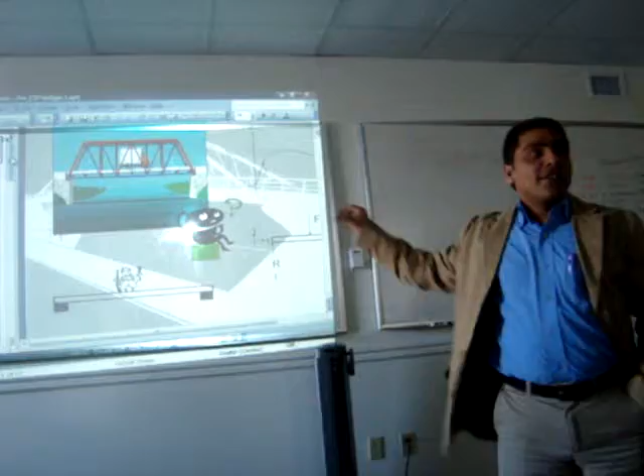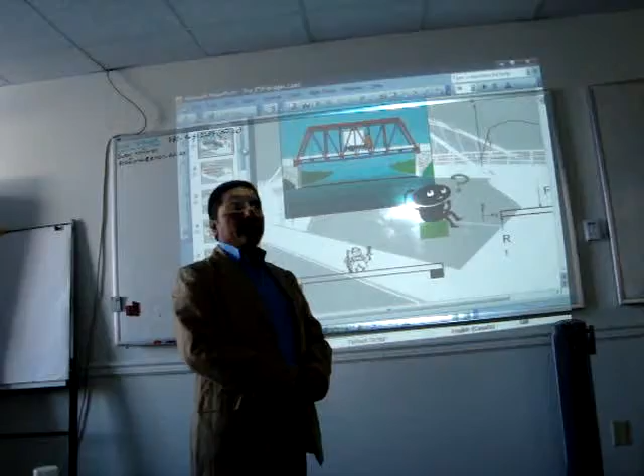I was really struggling to find a subject which could be of interest to everyone in the classroom, because there are few civil engineers and the majority are non-civil engineers. They are tending more toward technological subjects. Here I have a few figures or shapes which can brainstorm you toward a significant structure, and I think every one of you can easily configure the topic of my presentation, which is very general in understanding, very straightforward for the technical aspects, and which is a very major part of civil engineering.

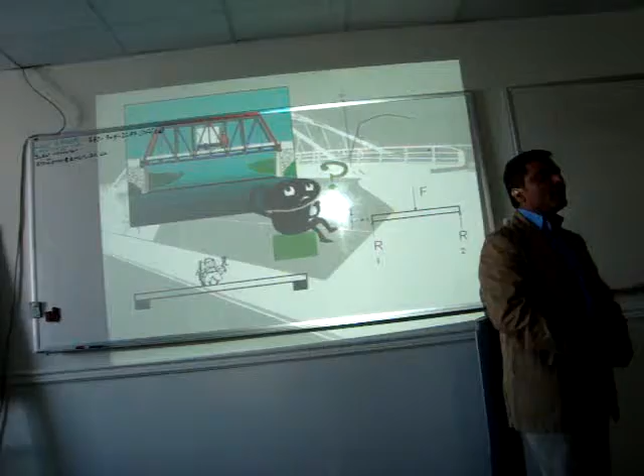Whenever you think of a civil engineer, you think of bridges. Bridges, as I told you, are the most common or most significant structures on the earth. Bridges on the earth imply many things. Bridges imply development in the world. Some bridge sites are romantic sites. You can recall your memories from Westminster Bridge, a poem from England. I'm forgetting the poet's name, maybe Wordsworth. Some bridge sites are sites of beauty. They inspire people. People want to visit those.

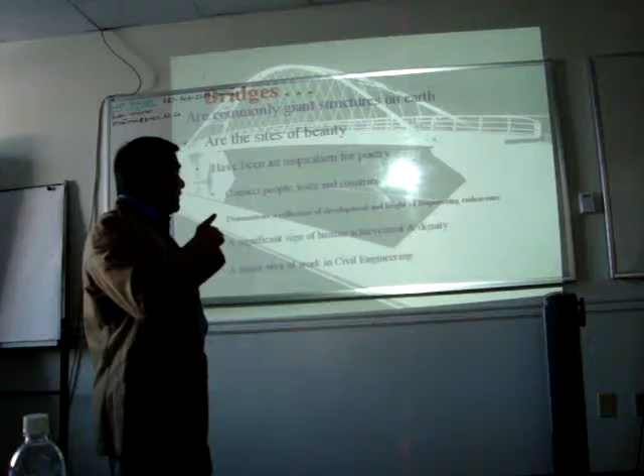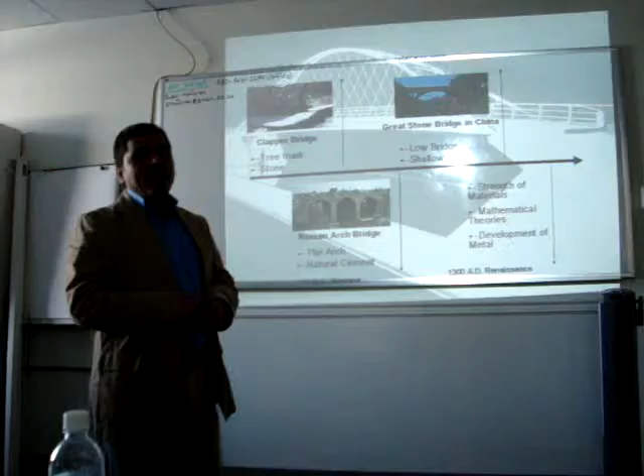But as a civil engineer and in general as an engineer, we are concerned with the technical or engineering aspects of bridges. We will try to figure that out today, and in the very last part of the presentation, we will try to learn how we can design a simple kind of bridge which is called a truss bridge.

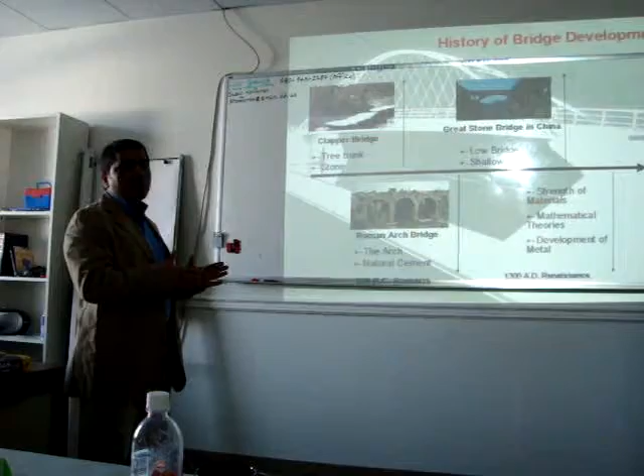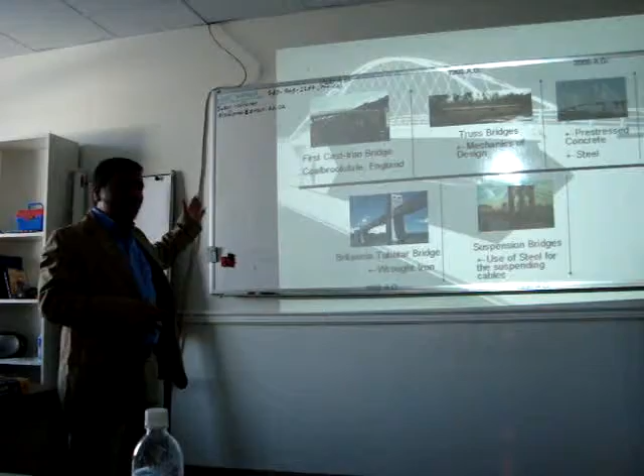This slide demonstrates how bridges developed through history. The bridge is not a new structure. People have been using it since BC, the old era, to the year 2000. They have developed over time through the materials utilized to build or construct a bridge, through technology and through engineering.

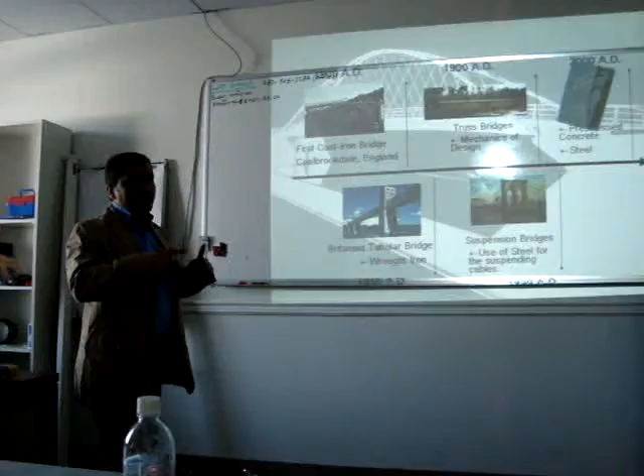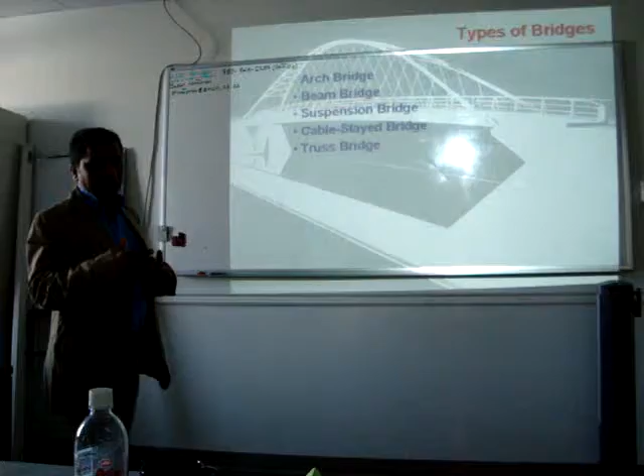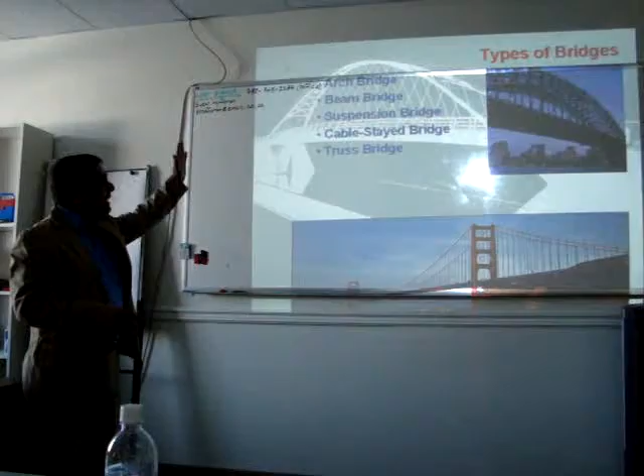Now we have very modern kinds of bridges, but mainly these depend upon a few basic concepts like the span, the requirement. What is the span we need to bridge, and what is the economical or feasible material available. These are the main basic kinds of bridges: arch bridge, beam bridge, suspension bridge, and cable stayed bridge.

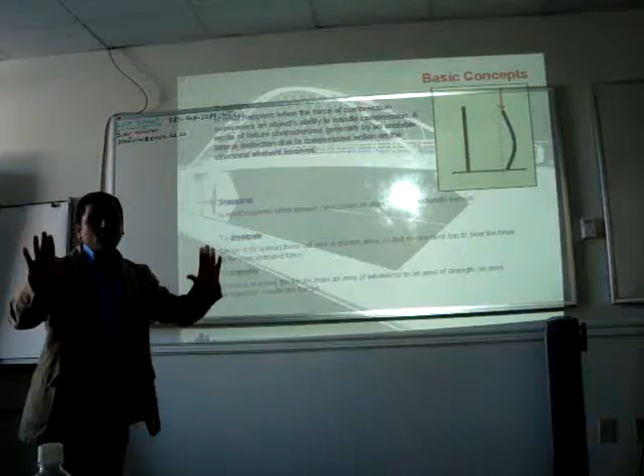Now the question arises of how bridges work. Every bridge is exposed to stresses like any structure in the world, but bridges are special as they carry live load as well as dead load. And the live load in the case of bridges is more critical for a designer. And nearly every bridge is exposed to the environment also. So these stresses, above all, cause buckling in the structures. So the main structure of a bridge is basically the columns, the piers, and of course the foundation as well.

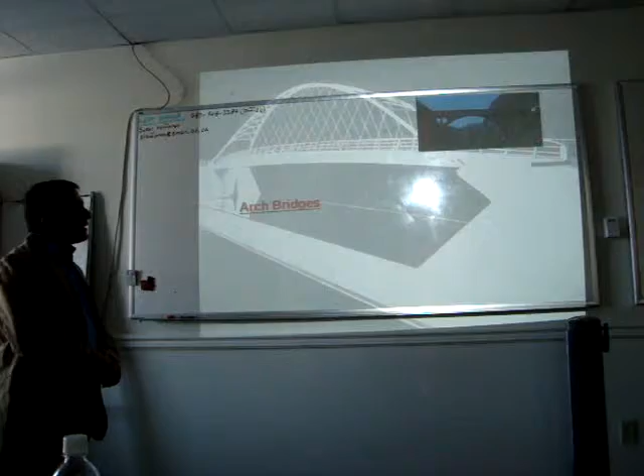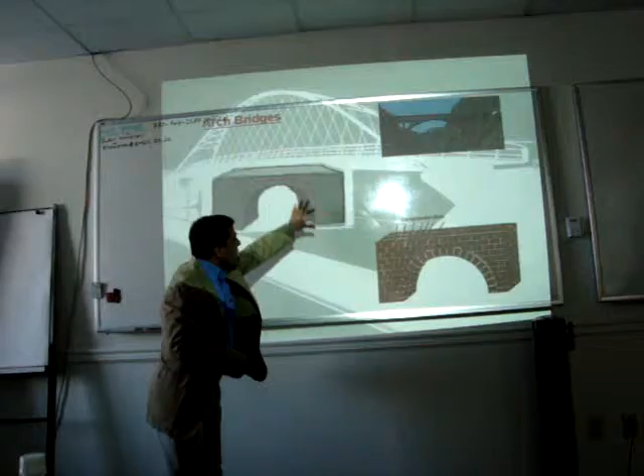Now coming to the types of structure, the very first or very common technology which we used over history is arch technology. An arch is basically a natural structure which requires no tension. Normally there is no tension in the arch, so we utilize the compressive action of the member.

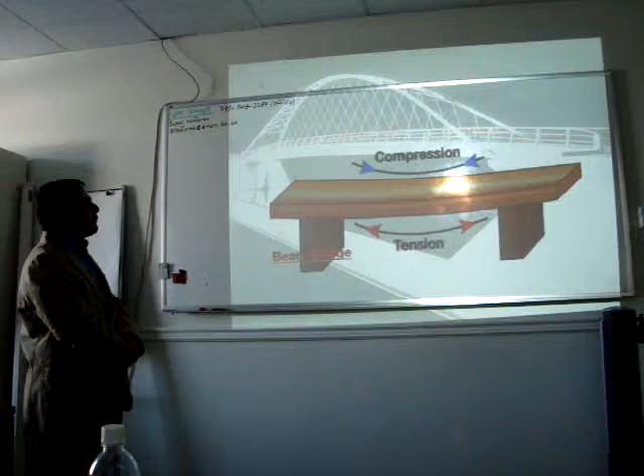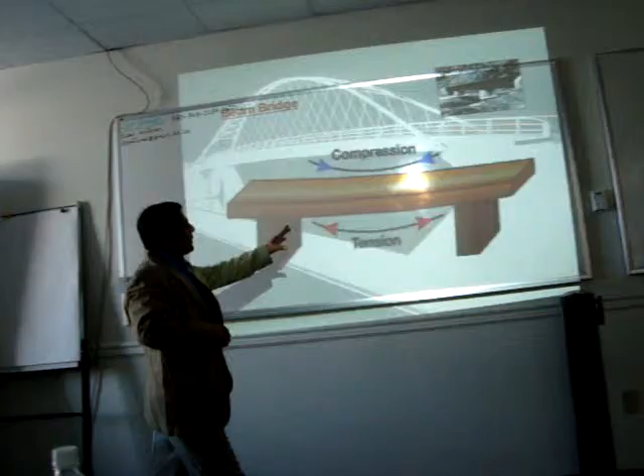The second type of bridge is the beam bridge, in which the surface or floor of the bridge is flat. Every flat surface tends to have compression on the top and tension at the bottom fiber, so we always need to reinforce the bottom fiber. The third kind of bridge is the suspension bridge. This is somewhat modern technology.

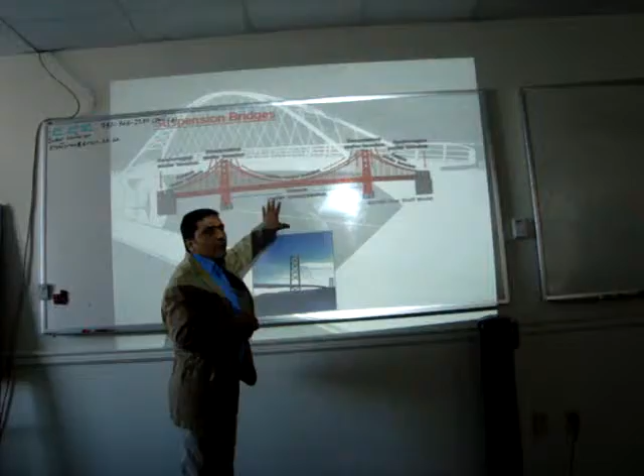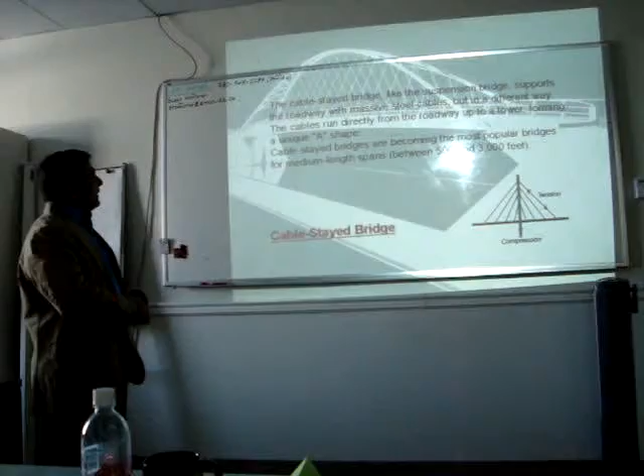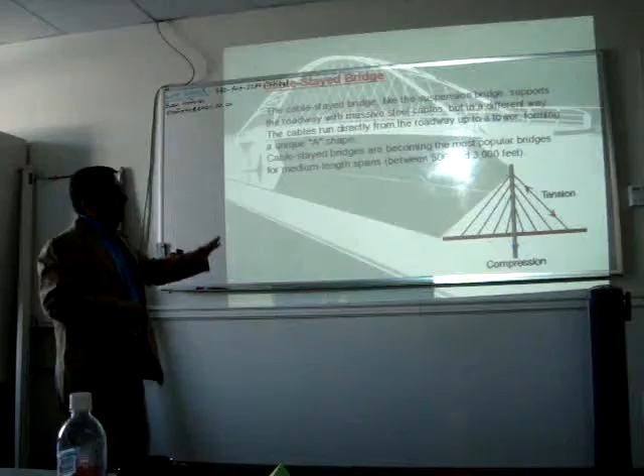Suspension bridges are built basically where we have longer spans, where more technologies are involved, where more modern materials are involved. A similar kind of bridge is the cable stayed. It requires less material compared to suspension bridges, but these are still very practical, and you can notice that these can be built over 500 to 3,000 foot long spans.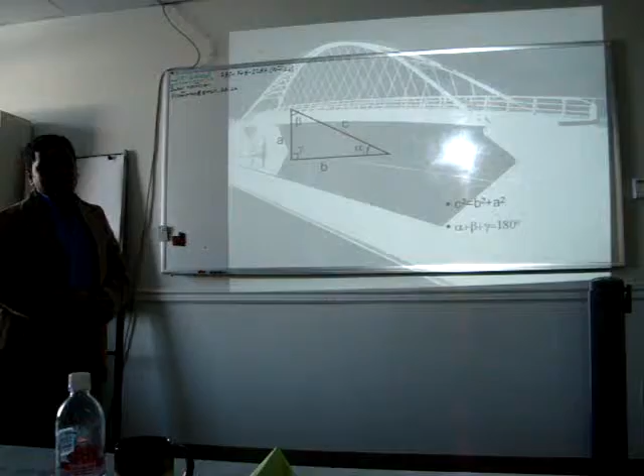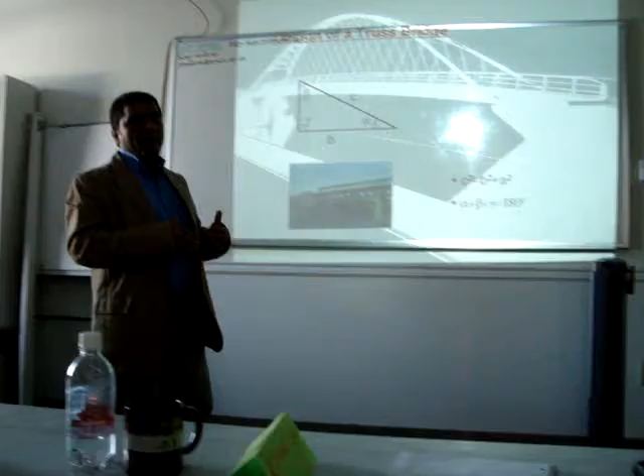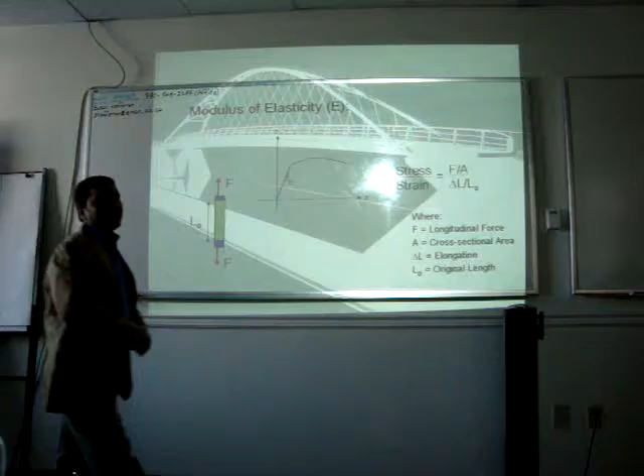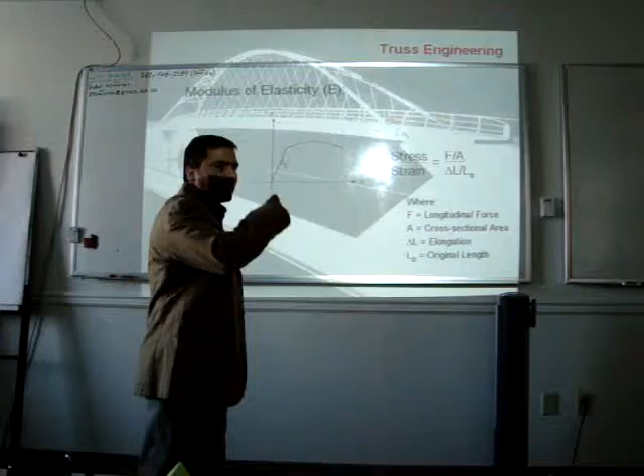Now coming to the last part of the presentation, truss engineering. The truss bridge is the simplest kind of bridge. Everyone who knows basic arithmetic, trigonometry, basic knowledge of triangles, and the Pythagorean theorem can initiate the design of a truss. Then modulus of elasticity and strength of materials knowledge are involved in the design, because we are dealing with materials and we need to know the strength of the material and the stresses.

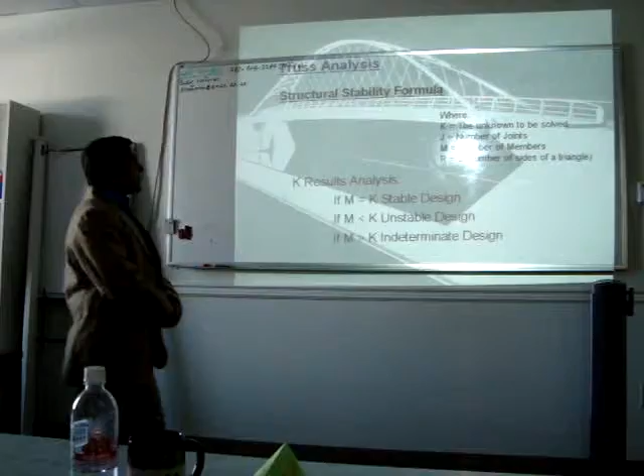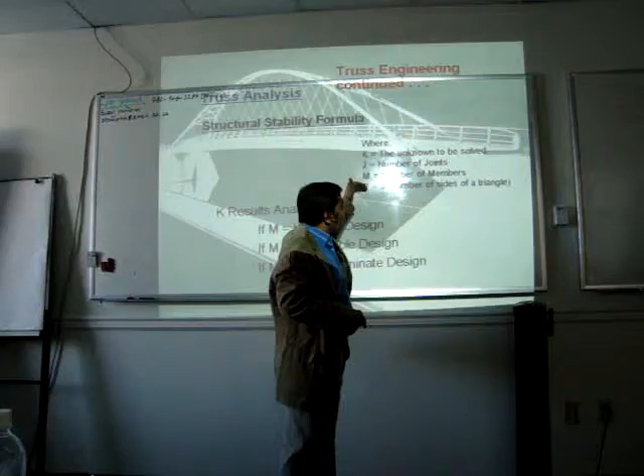In truss bridges, there are three main parameters to be known. These are the number of joints in a truss, which is basically a triangle, the number of members, and 3, the 3 sides of the triangle. So we have a very simple formula to figure out whether the truss of the bridge is stable enough or not. So here is the formula, very simple.

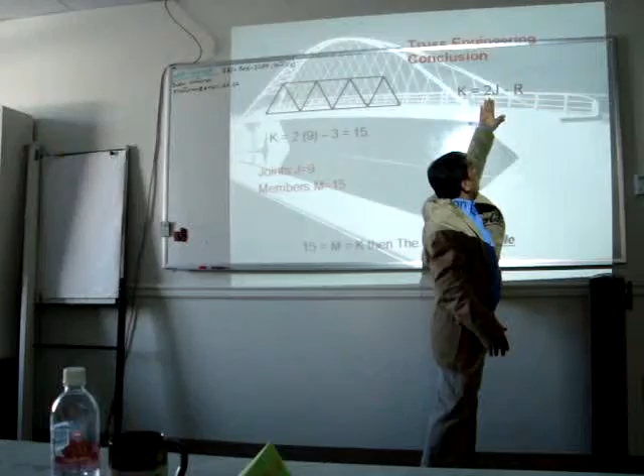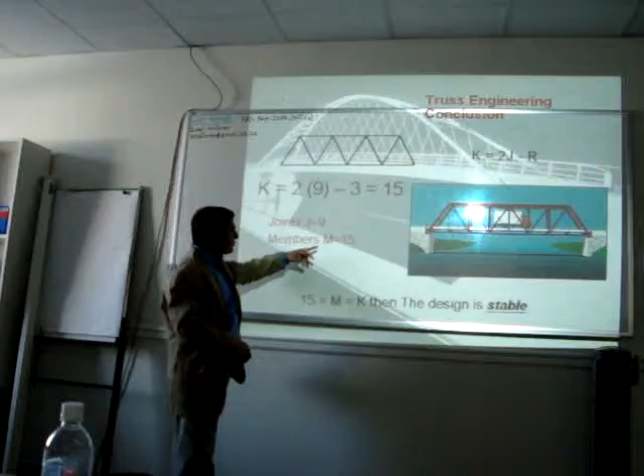K is to be known. 2j minus 3 is the basic formula. In this case, there are 9 joints. 2 times 9 minus 3 is 15, which is equal to m. And once m is equal to k, the system is stable.

Thank you very much. That's everything about bridges in a short time.